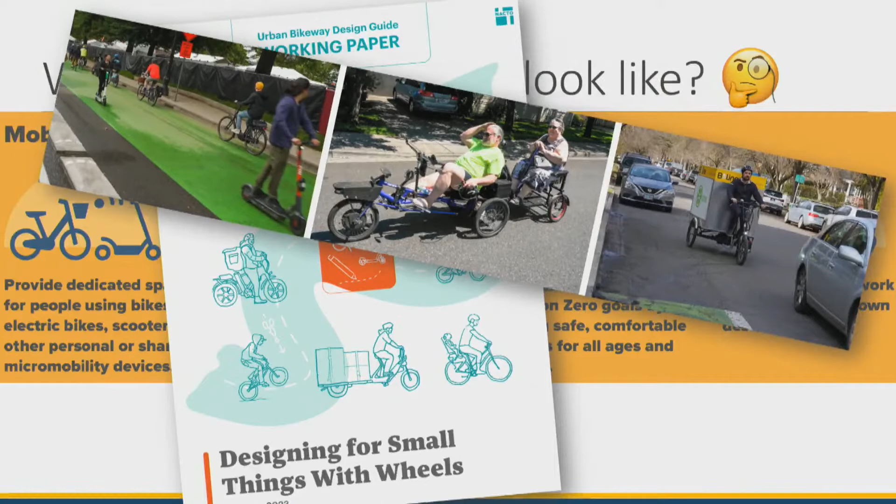This on the screen is our initial conceptualizing from the Connect Downtown planning process. Informing that are resources like NACTO's Designing for Small Things with Wheels, which could include bicycles, electric bicycles, scooters, electric scooters, all manner of mobility devices. And in that guide, for example, they're referencing a lot of different vehicle types, like cargo bike delivery and adaptive bicycles.

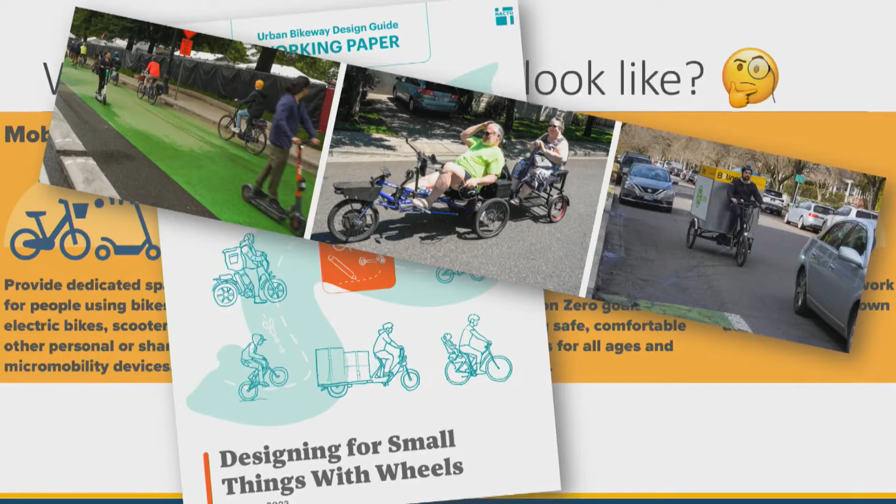The important thing we know is that the facility needs to be wider than we're used to, in order to serve people using different vehicles—social biking where you're not expected to ride single file, where you have the opportunity to pass folks like you do if you're driving. So this is what the industry has offered up as far as the mobility lane goes, but we've not determined what exactly that looks like in Nashville.

When we implement these mobility lanes in the Connect Downtown plan, we are considering a strategy of either demonstrating the facilities—that could be temporary, it could be durable to permanent. We don't know exactly where we're going to land on that scale.

One treatment that stakeholders like Walk Bike Nashville have recommended are low concrete barriers. They're higher than a curb, lower than a waist-high or chest-high jersey barrier. These are known as Toronto curbs and have been implemented in cities across North America. Concrete wheel stops and other treatments could work as well. We've not implemented modular concrete materials for a bike lane in Nashville that I'm aware of, so this could be an exciting treatment to try.

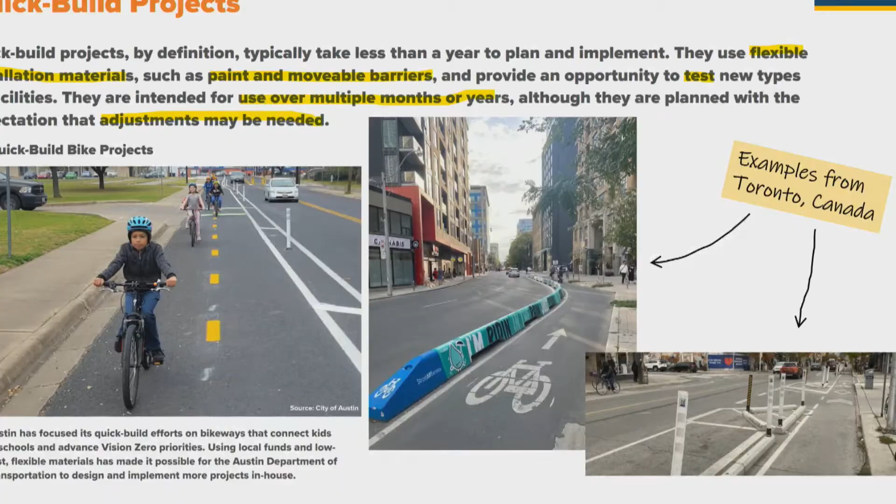And it would be quick build, but also durable, potentially even permanent. So the mobility lane network that we will be implementing includes almost all of the phase 1 Connect Downtown downtown mobility lanes. That's Demonbreun with a few different alignment options to get you across the river and north-south.

Union connecting to the Spokes project, 7th Ave, upgrading Commerce in coordination—ongoing coordination with stakeholders. First Ave by the river, Rep. John Lewis and 5th Ave all the way into Germantown. 6th Ave south of KVB, 11th Ave in the Gulch, closing that gap in the existing bike lane in the Gulch.

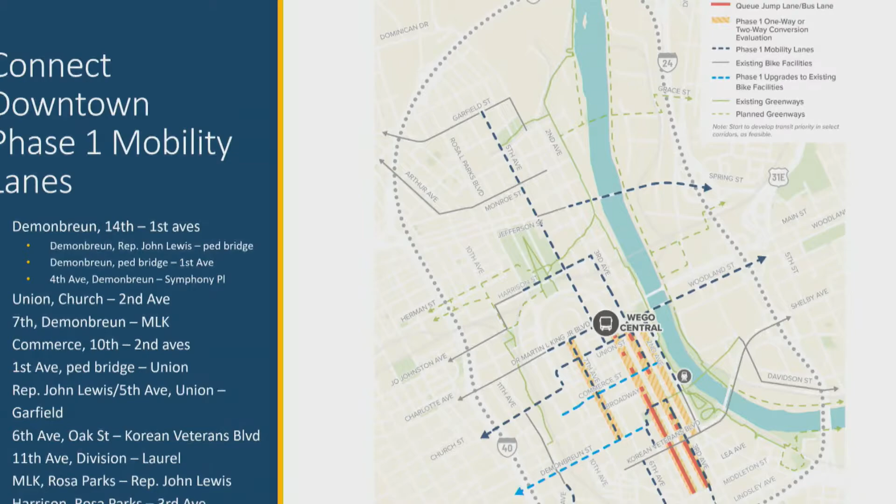A segment of MLK that currently is a shared street now, and then a segment of Harrison. Just some additional notes—this is some old thinking around those alignments between Demonbreun and the Ped Bridge. This is from about 2018, but it's a starting point for the various alignments we may consider. Ideally, we will end up with multiple alignments to get you from Demonbreun to First Ave and also to the Ped Bridge and KVB. So we'll need things like a connection on 4th Ave, for example, and across Symphony Place, across Walk of Fame Park.

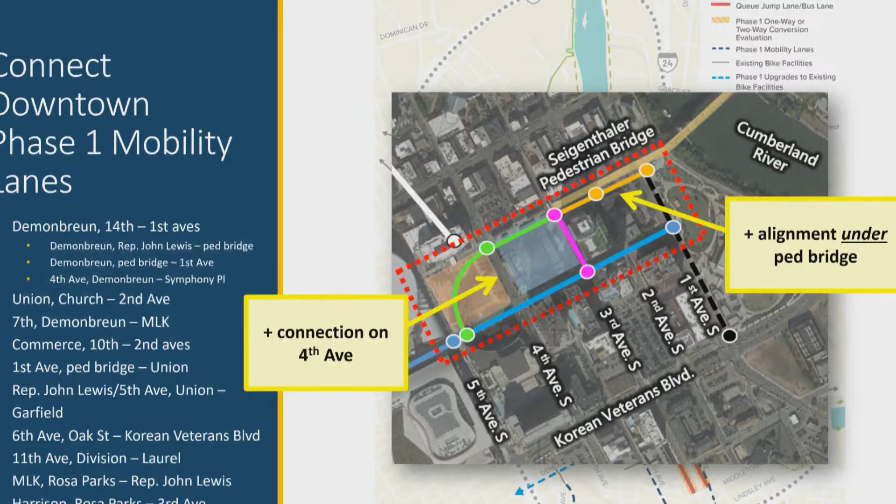We are at this point excluding the block of Rep. John Lewis adjacent to Music City Center, based on our experience coordinating with them through the Connect Downtown action plan process. So right now that's not included in the design scope, but is still a designated Connect Downtown mobility lane.

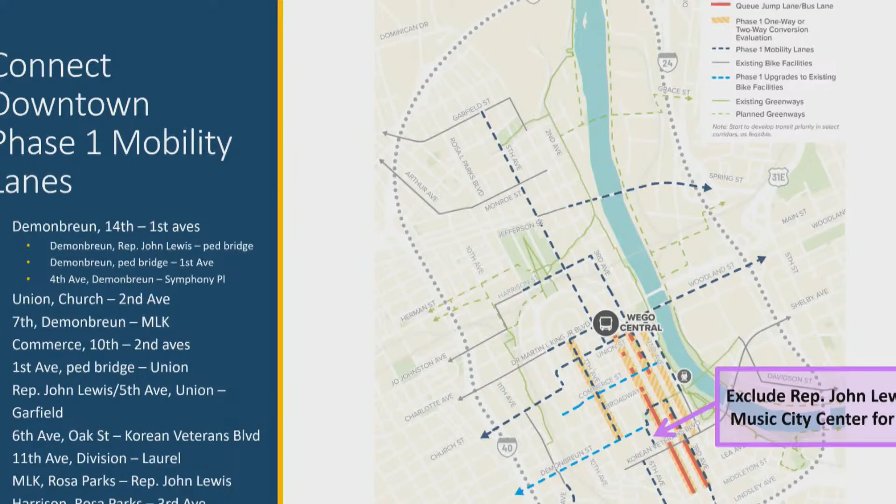You probably are aware 3 of these downtown mobility lanes are also Choose How You Move complete streets, now funded as of a couple Fridays ago. That's Demonbreun, 7th Ave, and Union specifically, which forms kind of a backbone for the Connect Downtown mobility lane network, providing north-south and east-west connectivity.

We're still determining if the CHYM and non-CHYM mobility lanes are implemented on different timelines. We have $3 million for planning, design, and to get us towards construction on the CHYM mobility lanes. We've requested funding for the remaining mobility lanes through the capital spending plan process, which is underway right now, and we should know by the end of the year whether we have funding for the non-CHYM mobility lanes.

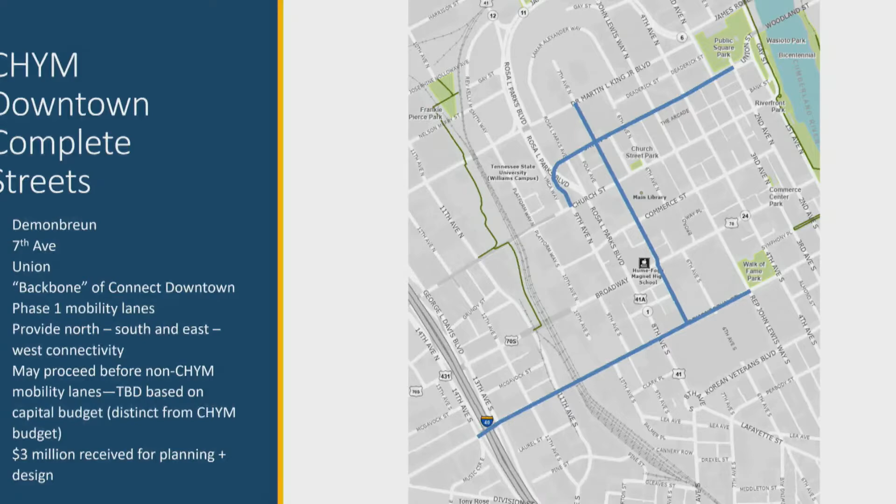Other pieces to note, kind of to the public comment earlier, we're taking a complete street approach. So it's not only a mobility lane that we're implementing, but we're also looking at the transit improvements that are needed, as well as curbside activity, signalization, and other associated improvements.

It does include these conversions, shown in orange, on 2nd, 3rd, 4th, and 7th Aves. It also includes the transit queue jumps in dark red. And just to note, the Jefferson Bikeway was recently completed, so we're considering how we make that connection between Rep. John Lewis over to Jefferson.

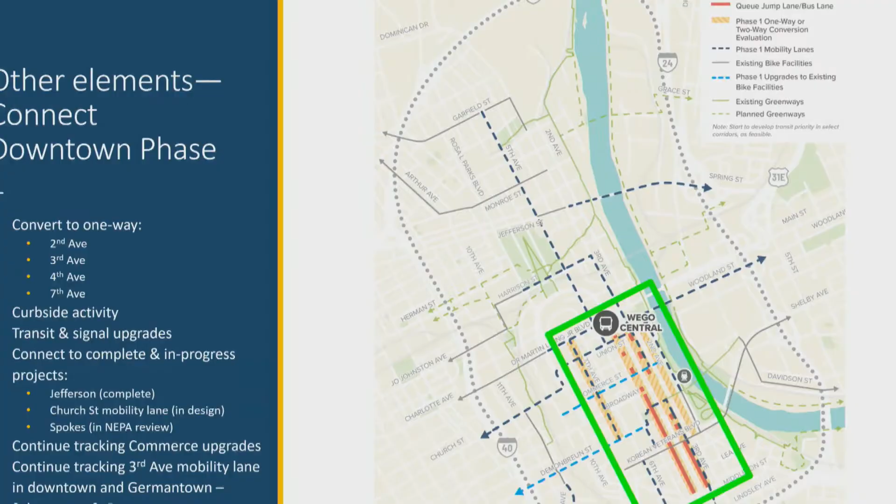So we assume that we'll know what plan was adopted this fall, around November. The mayor is preparing it right now. I assume you proposed projects to them, right? Yes, we propose to fund the non-Chime Connect Downtown Phase 1 mobility lanes.

So the Chime funding is separate from the regular capital spending plan? Right. And it's already been approved? Right.

Another question I have is you're showing some current and proposed greenways down there, which I assume is supposed to be a connection from the Ped Bridge to the Cumberland River Greenway? Yes, and we are not advancing the greenways as part of this project, just coordinating with parks.

Okay, because I've always wondered, what is the Greenway down there on First? It's more even than just the greenway. NDOT planning is also leading an effort that builds on the Second Ave reconstruction to re-envision First Ave. First Ave has a lot of stakeholders: the planning department and their vision, MDHA and their role, parks, and also NDOT. It's also a federally protected park, and any changes we make, because it received federal funding several decades ago, will definitely need to be an intentional conversation around if and how that park is modified.

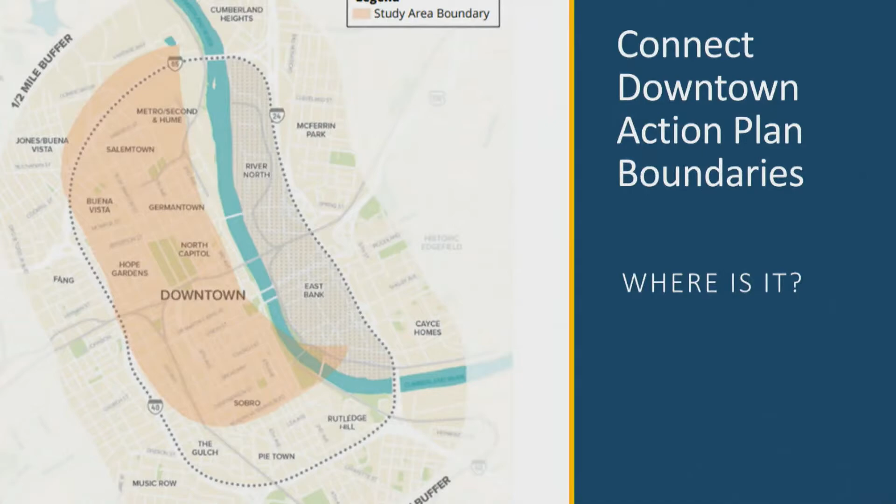Catherine and I, or Chair McDonald and I, were working on the agenda. She asked for a Connect Downtown update, so I thought I'd quickly remind you where Connect Downtown is. It's everything inside that dotted line. It works with the East Bank project, but its real focus is from Cumberland West inside the interstate there.

Just to take you back, why did we do it? It was identified in the Metro Nashville Transportation Plan that it was needed. As you all know, downtown slows to a crawl many weekends and when there's lots of events. We've got lots of construction happening, lots of people living there. Basically, we've got to do something.

The Connect Downtown challenges and goals, as you all know: people are stuck in traffic, loading space is limited, Nashville is popular, travel options don't match desires, transit's slow, and our streets are unsafe. We have safety issues we're constantly working on out there. We need a plan.

The Connect Downtown plan had these 5 big moves: manage congestion, that's adaptive signals; improve safety, vision zero efforts; move more people, that's our transit corridors projects; create complete networks, that's better sidewalks and bike mobility downtown; and then maximizing the curb. That's something I'm working on a lot lately.

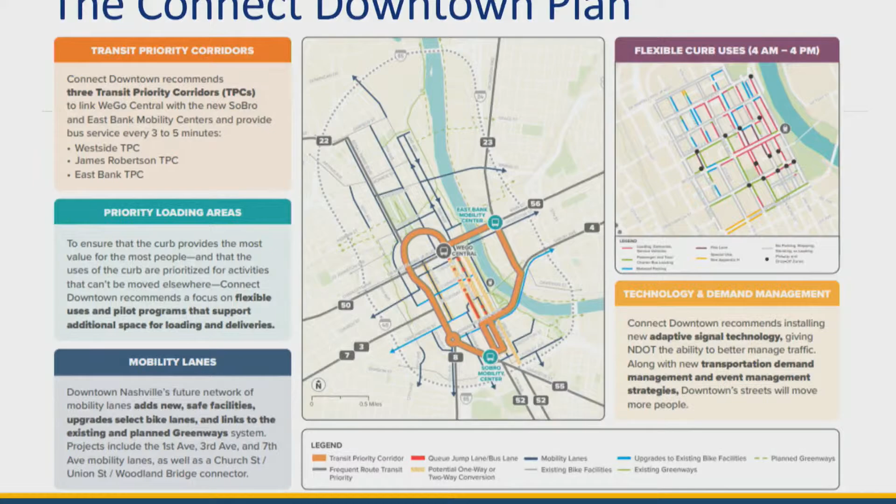Just wanted to remind you of the Connect Downtown plan, that everything connects the whole metro in through downtown. It's really a hub and spoke. If you look at that plan: transit priority corridors, priority loading areas, mobility lanes, using technology, adaptive signals, and flex lanes. It's a 10-year plan. It isn't going to happen overnight, although there's already a lot of work going on with it.

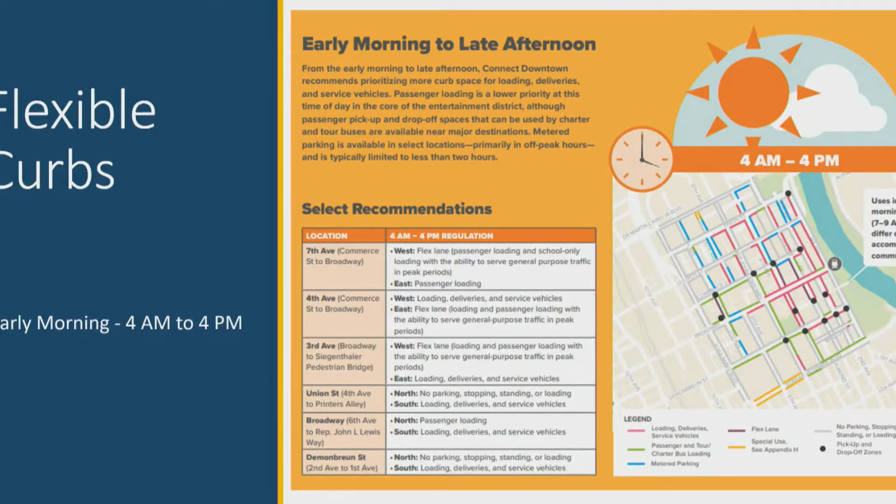I'm not going to spend a lot of time on the flexible curb, but just to tell you, I am doing things on that all the time with downtown businesses. We're talking about flexing the curbs to match this, because it's going to give them more space for loading and unloading and more space for passenger drop-offs, so those happen.

One of the big initiatives right now that I've been working on, having a lot of engagement meetings—I think I've had close to 8 to 10 now—is the 2nd Avenue street conversion. With the 2nd Avenue rebuild project, that's going to be done probably end of December. They're almost done with it, and the plan for that street is for it to go to 2-way from basically Union all the way to the interstate.

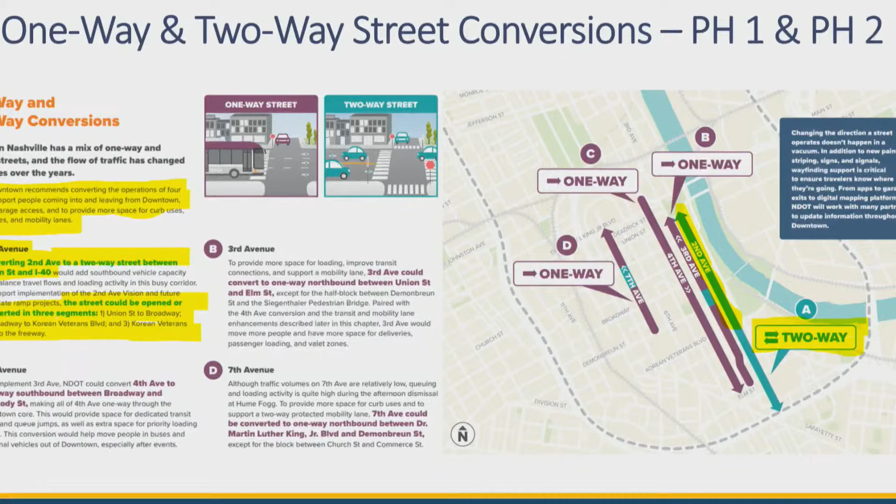However, what we're working on right now is just from Union all the way to KVB, that section of the street. TDOT's not ready with their interstate improvements yet for where 2nd hits it, but we are in discussions with them. So one of the things Connect Downtown said to do was on 2nd, 3rd, and 4th: study them before you do the plan.

We've studied it—KCI did a study on it. First off, it's a key project to begin a multimodal plan for downtown. It's the first of those 4 streets that we need to do. It improves accessibility and new southbound access to downtown.

I walked that street and handed out flyers to everybody to come to a meeting on one of the meetings on that. Pretty much everybody on that west side of the street wants southbound access to their businesses. Now there are businesses that don't want it at all—they like the northbound access, they think it works. But that's not what the study bears out. The study says we need the 2-way access.

What are the other benefits? Decrease miles traveled and turning movements, improve circulation. It eliminates wrong way driving on that street. Some of the businesses on that Broadway and 2nd told me they're stopping cars all the time from turning on Broadway down to stop them from going down a one-way street.

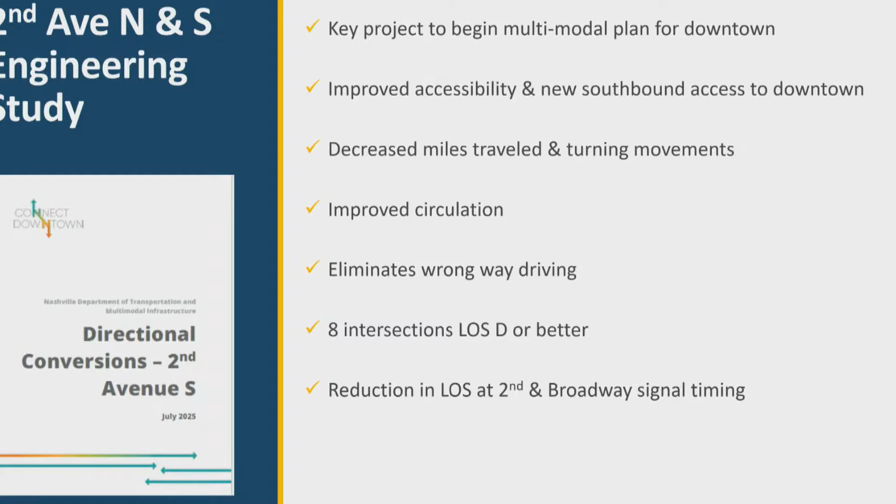8 intersections are level of service D or better, with a reduction in level of service at 2nd and Broadway. We've got to put new mast arms and signals on that street for the southbound traffic. There's, I think, 4 or 5 locations where we have to put in new poles as part of that project. Also on 2nd and KVB, we've got to put in a foundation and a very large pole to make that all work.

So these aren't precise plans, this is just basically—I wanted to show you one of the things that people were saying: there's no loading or drop-off areas for 2nd.

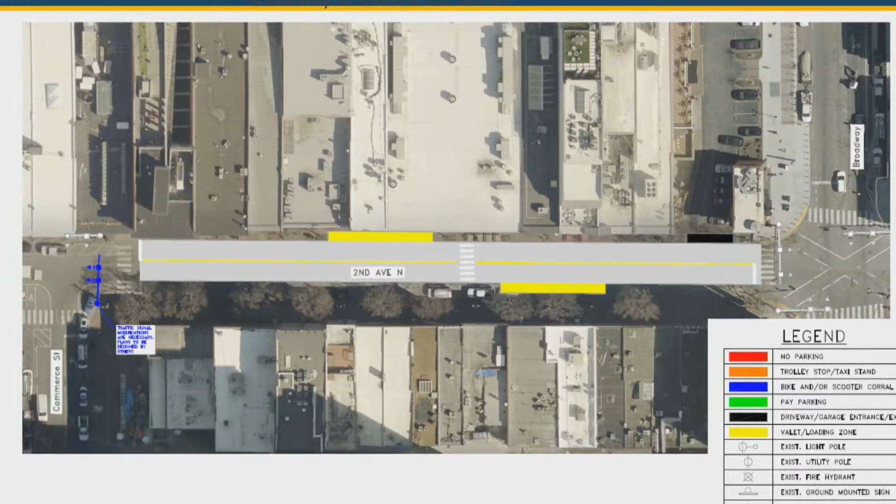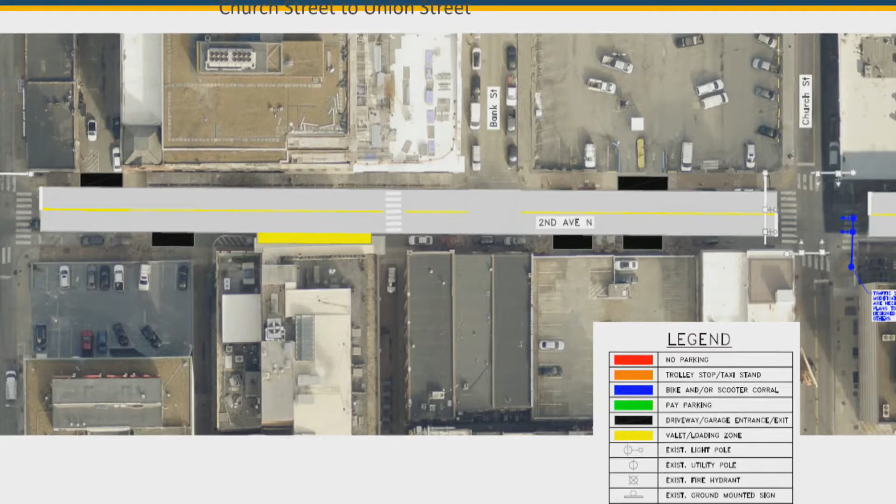Yeah, there are. This is the areas from Broadway up to Commerce Street - there are 2 of them there. And then there's 3 from Commerce up to Church, and then another one from Church to there. They're like 63 footers, and some were saying, well, we don't have it. Well, you don't have them because the street's blocked right now under construction. There's 3 of them in there that you can't use, but they soon will be able to use those. And then here is the plans that KCI did from KVB all the way up.

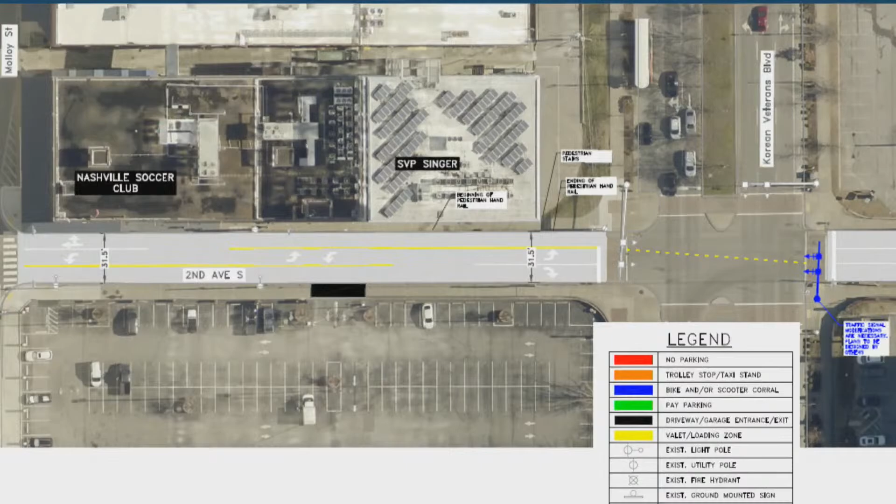It's basically a 3-lane center turn lane, and you've got the northern travel and southern travel. Then you've got this area between the short stretch between Molloy and Demonbreun. It's got the 2-lane with the 2 left turn lanes in it. You can see the little blue marker up there - that's the signals. And then they've colored what happens in the curb there.

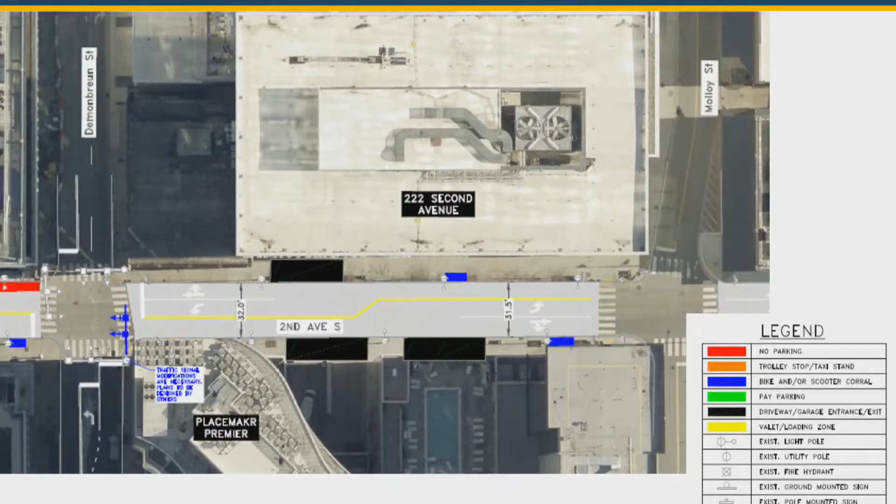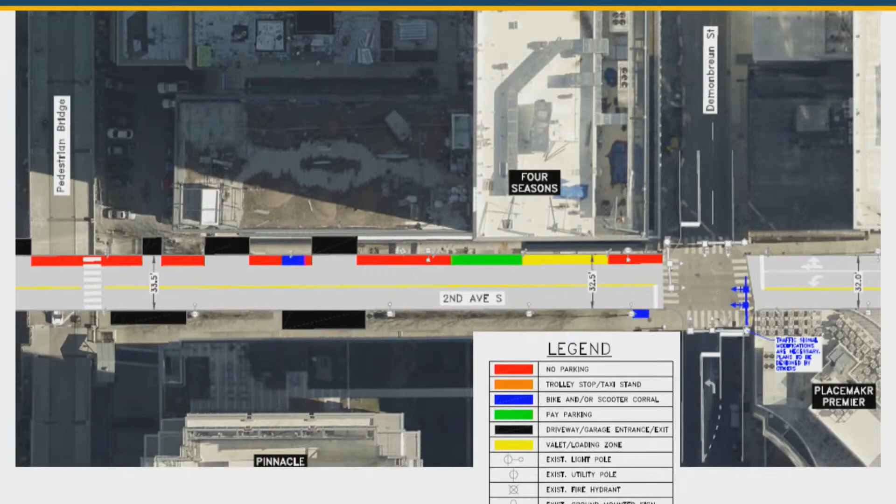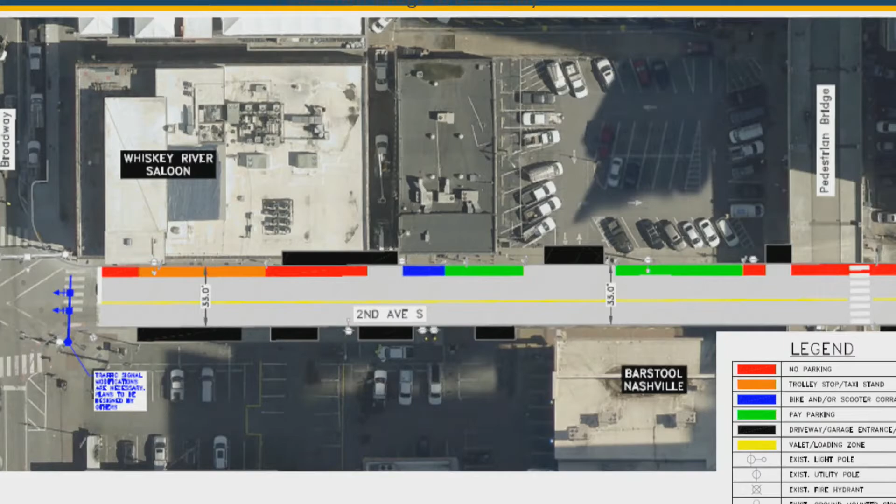And then when you start seeing the curb uses flow in there, you see the no parking areas, the bike - you can see where I put bike corrals in there, the blue ones, the pay parking areas, and then in green, and then use the black - those are openings to the parking structures or into parking areas. And then from the Ped Bridge or bike bridge all the way up to Broadway, you can see one of the last signals that goes in up there, and you can see the same kind of uses that are on that east side of the road. So that's what we've been working on.

One of the things we're going to be doing - one of the complaints from some of the people is there isn't enough enforcement on 2nd Avenue. Well, that's not exactly true. In the last year, we've done about 1,200 citations on that street to stop people from blocking it. We'll continue that. But what we've committed to do, we're going to do a 3-week enforcement program out there where we're going to have our staff doing education to the delivery companies and taxi companies and rideshare and everybody where they are to be, where they're not to be. And then after those 2 weeks, we're going to start writing citations if the people are blocking the road.

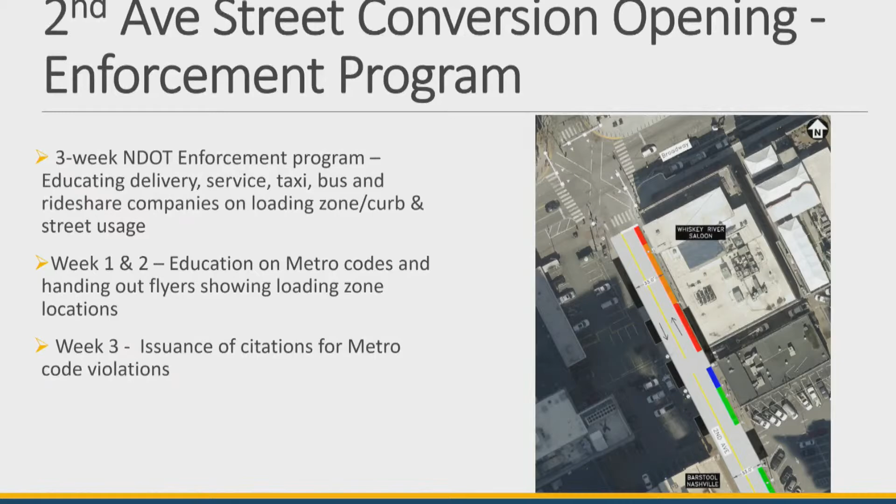Also, downtown really is a work in progress, and it's on implementation at Connect Downtown. I think when I get out there and I'm on my bike cruising around or walking around, I'm always looking for opportunities, talking to people, how could we adjust the curb uses so it not only is safe, but it's going to help their business, but help us get people in and out of there as efficiently as possible and try not to jam it up, which is very hard to keep going on a day-to-day basis.

The next thing I wanted to let you know that we've been working on is the downtown bollard Raptor installation process. This is one our engineering team's been working on. These are special - what would I call them? - just protection bollards. They're flush most of the time on the ground, but if somebody is barreling down that street and gonna try to do something, our police and fire and teams can put those up. They go up immediately. My understanding is they can stop a fully laden Mack truck at 55 miles an hour.

So this will be our first one. You'll probably see it after Veterans Day. You'll see construction happening out there to put it in. You'll also see over to the right there, you'll see a big box that controls it. It's very sophisticated - it's the latest technology for protecting streets, so that'll be probably done by end of November is what I'm hearing, so that's the current schedule on that. There's another picture of it from the other way.

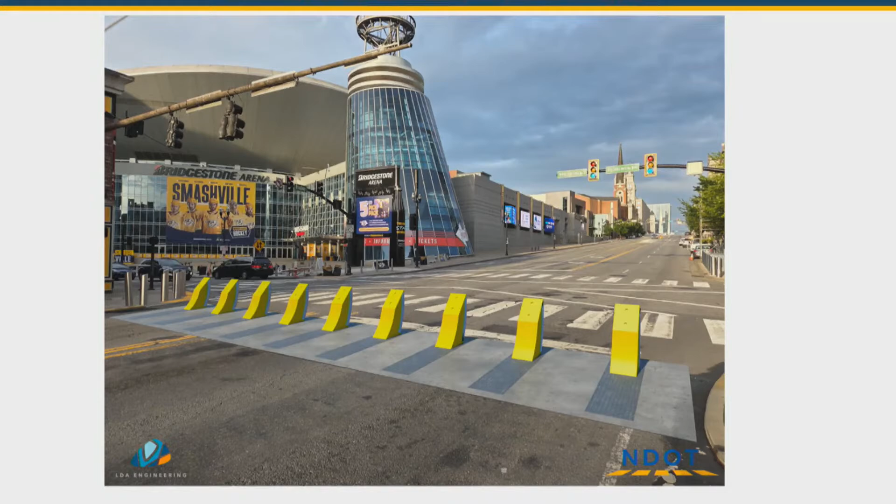Is it just for emergency situations, or could it be for closing the street off on a busy Saturday night? I imagine they can use it to close it for a special event or something like that. Yes, I'm sure they could use it for that. And there's ongoing meetings with that. Our fire department, police department are obviously in there at every meeting with our team, the engineering firm that's working on it, and the company that makes those Raptors has been in there.

The next thing I've been working on, TPAC's been going good. We did a rideshare pilot up there. We're on our second phase of it, and it seems to be working good on Deaderick and 6. We got 2 rideshare pickup drop-off zones that are only active when they have events. And I was asked by our director to go out and find other locations. If you look on that flexible curb plan in the Connect Downtown, it's got little black dots.

Those were the rideshare pickup drop-off zones envisioned. I went out there, not very many of those worked. I picked these, so there's about 26 of them.

They could hold approximately 80 vehicles. They're from the size of 2 to 3 parking spaces up to one of them's as big as 9 vehicles could be stored in it. They're only to be there for 15 minutes to pick up or drop off. It's not for like a taxi stand, that's not the idea behind it. So it's for short-term use, 15 minutes.

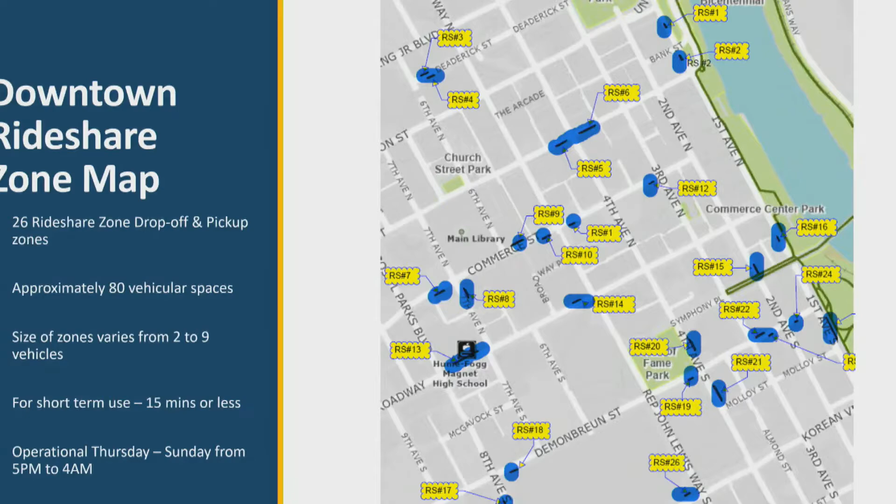We've tried to use loading zones. There is some of them in metered parking areas, but it's not going forward. And I'll let you know if I get their commitments. Right now they seem very interested in it, but we'll see. I want a commitment before we put up a bunch of signage and try it out.

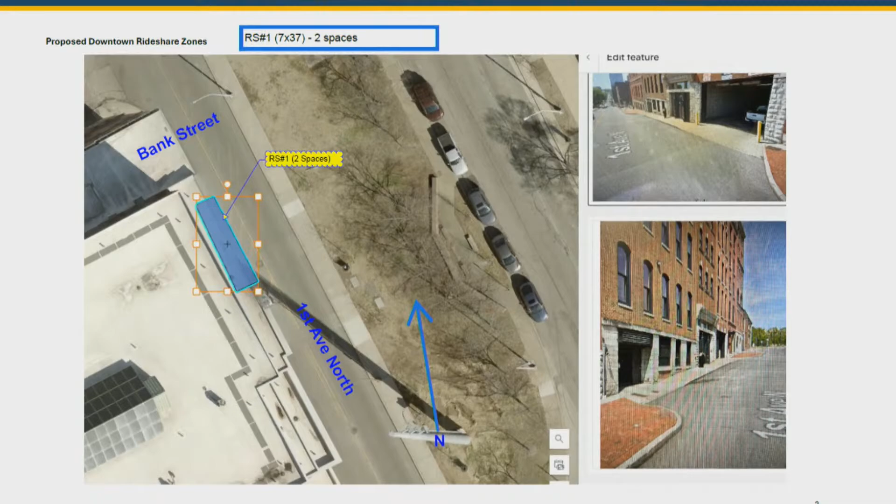Here, I just wanted to show you some pictures of them. I use with my handy phone, I've got latitude, longitude of each one. I've sent that information to the company so they're looking at it now to see if they can use them.

So this is encouraging the use of cars, correct? It's rideshare pickup drop-off zones, it's to focus them, what's going on right now is. But why should we care about that? Well, you wanted—this is not a rideshare commission. Yeah, you wanted an update about. Well, not about rideshare, I'm sorry, I don't. Maybe everybody else does. Well, I was asked by the chair to give it. I can go on, and—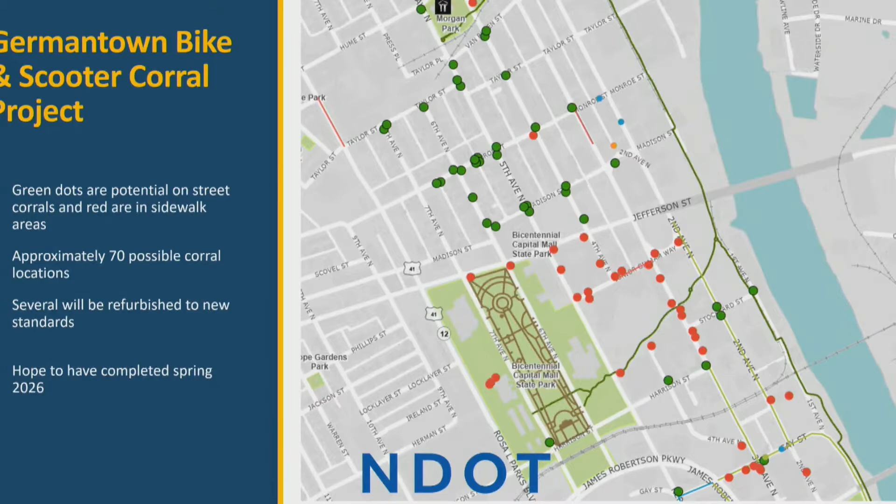You said there are 70 of them? Approximately about 70, but you don't know, don't hold me to that, because there could be—when I get out there, we had interns do a lot of these, and then I went out after the interns did them, and some of them didn't work. But I ended up with 140 that we put in downtown that didn't exist, and I got those done in about 3 months.

So 140? There are 140? 140 scooter, this— and bike corrals that I did downtown. Not when—70, when I first got here? But this one has 70 is what I've counted. I need to go double check them, see that they work. If they do—so there are 140 downtown and 70 more in Germantown? Up in this area, okay. But don't hold me to that 70.

Okay, how much does each corral cost? Oh gosh, I'd have to go pull those, I don't have those numbers. Are you doing them in-house or with contract? We're doing them in-house, yeah. In-house, okay, they do—your fee study says they cost $1,000 each. Yeah, the guys are really efficient, they can do them fast.

How are you funding them? They're being funded right now with the Connect Downtown monies that we have in our budget. Is that capital funding? I think it's capital funding, but I can double check that for you. Okay, how many of them have bike racks? I'm sorry, how many of them have bike racks? I have to—bike rack, the ones I did downtown are here. Anywhere, any of them? I'd have to pull—okay, can you get that? I can get that for you, sir. Okay.

Yes, and at some point these should be mapped. They are all mapped. Do the scooter companies have them in their apps? They do, TD's got them all. Every time we did the downtown ones, we met probably every two weeks, and then our GIS people gave TD the latitude and longitude of each, and those were given to the bike and scooter companies. I met with TD and the bike and scooter companies and told them to use them. But it's not required, it's not mandatory. No, it's not, but at least when I go out there, they seem to be used without making them mandatory.

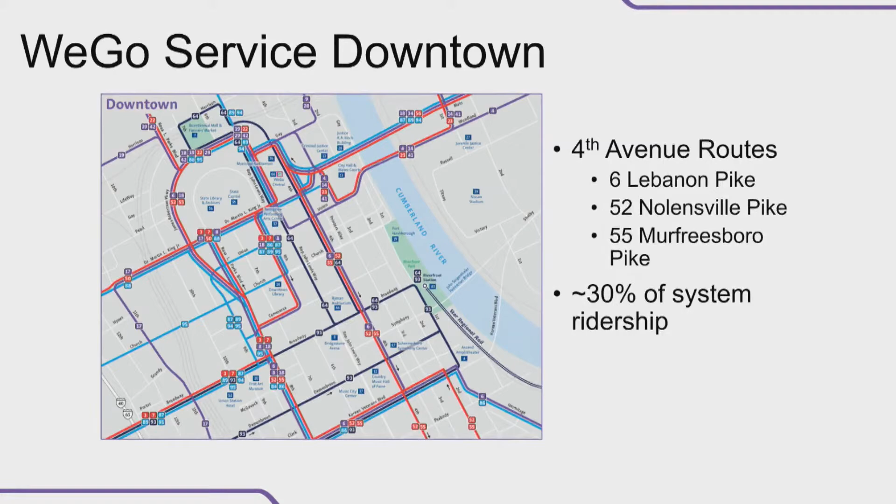On a typical Friday or Saturday night, there's a few hundred passengers that board between Central, Church Street, and the Convention Center.

But 4th Avenue is a really challenging operating environment, especially on Friday and Saturday nights, as well as nights of special events. First, in terms of safety, there's a high volume of pedestrians. A lot of them are not familiar with the city or with the crossings at Broadway. A lot of them may be intoxicated as the night goes on, and don't necessarily have a lot of awareness of their surroundings.

It also creates a really slow operating environment. Our median speed on Friday and Saturday nights is around 2 miles an hour. There are nights where it can take a bus close to an hour to go about a third of a mile on the really busy nights.

In terms of reliability, it creates a really negative experience for passengers. If you know the last bus is coming through at 1:20 and you're clocking out of work, it's really frustrating to clock out at 1:20 and then the bus doesn't come till 1:45 or 1:50. Same thing if you're leaving an event early because you need to catch the last bus home, and then that bus doesn't come, or it does come much later and you could have stayed at the event longer.

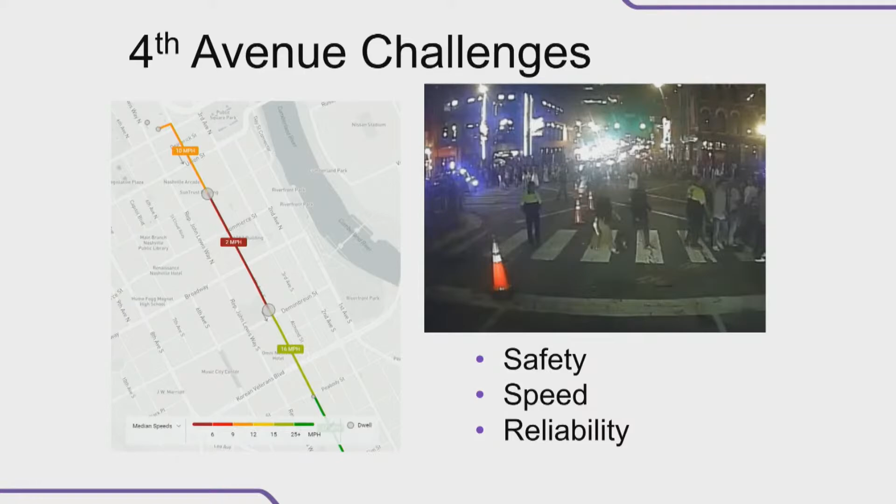You can get on the bus at the same place, regardless of whether you get off at 6 o'clock or 6:05, for example. It's also challenging in terms of communication. We have a lot of passengers, particularly at the convention center, who don't speak English as their first language. And some of the alternatives are not even faster all of the time, so we don't want to introduce that level of confusion for something that may be equally slow.

Connect Downtown, like Brent said, does eventually shift these routes to 8th Avenue, James Robertson, Rosa Parks, 8th Avenue. One of the things we're waiting for before doing that is the improved facilities that come with these transit priority corridors. First, when we add these buses to Rosa Parks, it doubles the number of buses on that road, a road that's already congested. We already have problems sometimes where a bus can't come through an intersection because there's not enough room due to the queue.

And in terms of passenger waiting facilities, 2 of the busiest stops in our system are 8th and Broadway and 4th and Convention Center. Combining those 2 stops without making improvements to that area is going to result in challenges picking up passengers and challenges for people trying to walk on the sidewalk getting past the bus stop there.

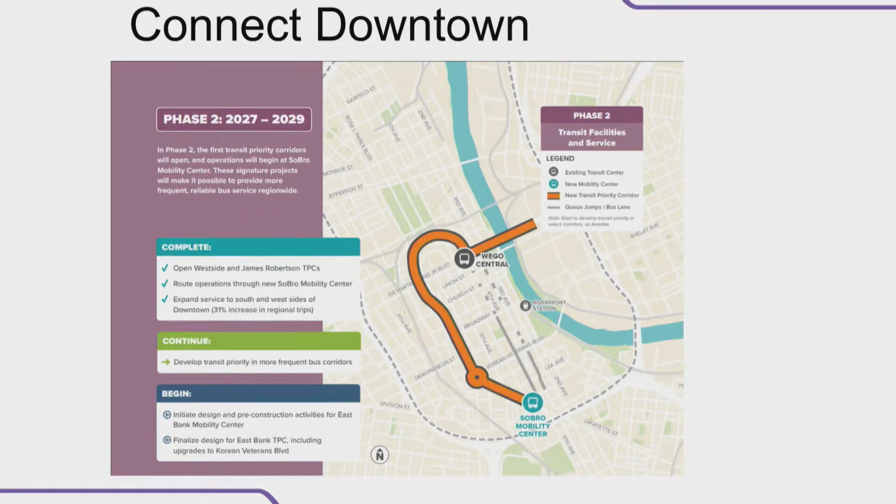Since September 12th, we, in coordination with NDOT and MNPD, have been piloting a bus priority lane as part of a larger traffic control plan downtown that includes the closure of Broadway, with cross streets open to improve pedestrian safety as well as emergency access. There has been a bus priority lane operating from approximately midway between Church and Commerce down to just past Broadway, and some nights to Demonbreun, around 1,000 feet.

It's been staffed by officers contracted through a security company, operating from around 7:30 p.m. until the last bus comes through at around 1:30.

17 officers sounds like a lot, and it is. Several of those officers control pedestrians at 4th and Broadway, which is key to keeping things moving, and it takes a good amount of manpower to keep people out of that intersection. Others manage the contraflow lane for general traffic on 4th between Broadway and Commerce, and the remainder enforce the bus lane, ensuring other vehicles aren't going in it.

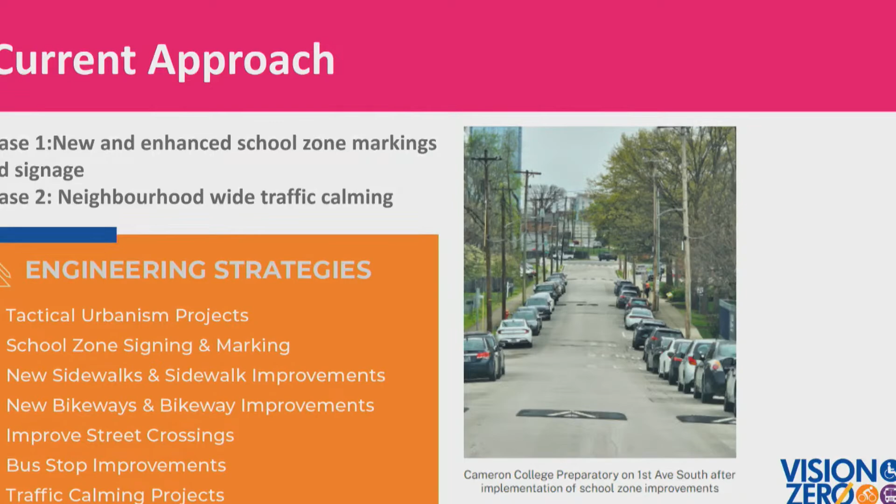Trying to capture all of MNPS has historically been a huge challenge. To date, our services have really relied on being on-call. So if a school has an advocate who knows the avenues to reach out to their principal or someone in the administrative staff, it may get to us, but unless a school has an advocate who knows the appropriate channels to contact us, we often don't even know there's an issue. So we went ahead and took a look at prioritizing every single MNPS school, including charters and privates.

Our goal is to create uniform markings and signage for every single school in Davidson County. We took a prioritization approach based primarily on the high injury network, but also a vulnerability designation, as well as crash data. We took all schools, looked at a 1.5 mile buffer, created a scoring system, and it shows a couple different features at the bottom - distance to high injury network, and vulnerable designation status.

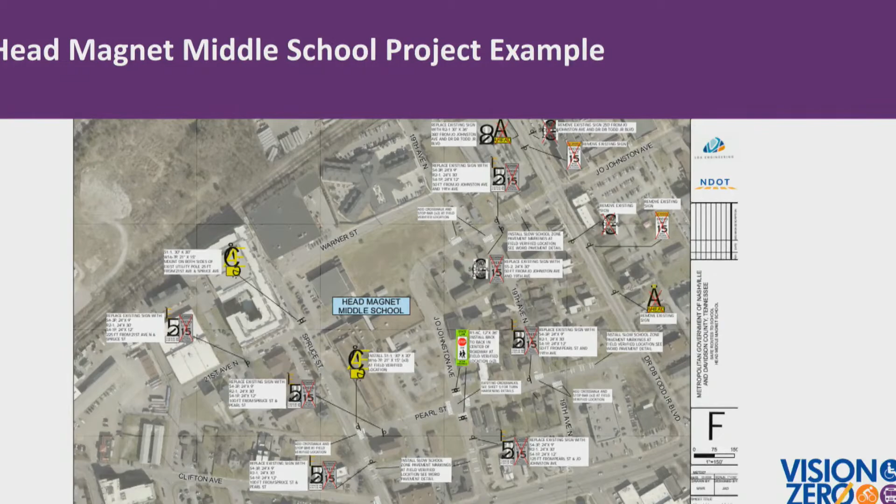We're also working with coordinating project selection. We don't have all the funding available to do the biggest transformations that we know would make the biggest impact. So as we start to work with projects being developed through the Tactical Urbanism Project or other capital projects, we're running them through similar criteria, looking at items like, are they on the high injury network? What's the proximity? Do we know how many people are walking and biking to school? What's a neighborhood's crash history?

Overall, Nashville's Safe Routes to School represents a collective commitment to the safety and well-being of its young learners by combining infrastructure enhancements with engaging educational initiatives and community partnership. The program aims to create a city where every student's journey to and from school is safe, accessible, and enjoyable. As we embark on this endeavor, we invite the entire Nashville community to join us in shaping a brighter future for our students, where every step they take towards learning is a step towards a safer and healthier future. Together, we can make Nashville a city where every student's journey is a safe and enriching experience.

I'd say really where the big community aspect comes into play, it really is in that phase 2.

So I think we know pretty easily where striping and signage is going to go, but the Dan Mills community was a really good example where they made requests for adjustment of signals, which we could do, but there were additional requests for new crossings. They had also made a recommendation for removal of a double yellow line and adding potential markings to highlight a potential neighborhood greenway.